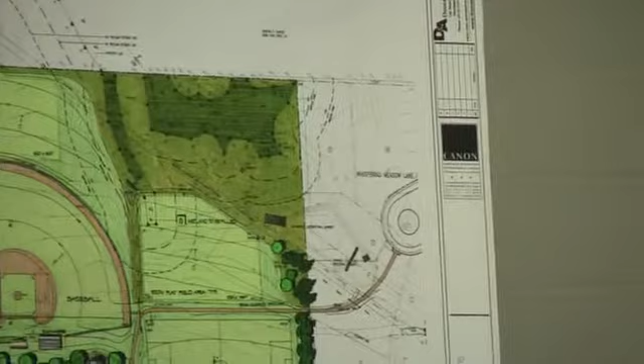The parking facility would connect to Strong Road with a 24-foot wide driveway that we've sensitively located so that it connects to Strong Road in between the existing houses, thereby minimizing the amount of possible night lights that might be exiting the site in the dusk times during the weekend or whatever.

It takes on an interesting, nice curvilinear approach to the parking area. I think it really stands nicely from a configuration standpoint to lend to the park-like setting. That also would allow us to tree up the entrance drive to the parking area, and also provide shade trees around the parking lot.

Landscaping of that type, I feel, would also add to further buffering from the residents of Strong Road—both the visibility of the activities and structures within the park, and it would probably also act as somewhat of a noise attenuator when there are large groups there.

At the end of the parking facility, our thought was that would be a convenient place for siting a building that would provide concessions during events. We all recognize that concessions can be a very supportive activity during recreation or sporting events, so we wanted to accommodate for that. This building would also have restrooms and enough room for storage of athletic equipment.

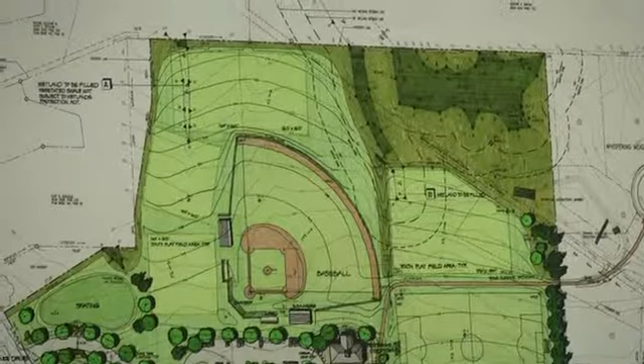Adjacent to the concession stand, we also located a play lot area that would be treed and protected from the south for a little bit of privacy. Perhaps adjacent to that would be a small patio connected to a walkway apron around the building, which could accommodate some picnic tables.

Perhaps there's some supervision that would be required for kids that might be using the play lot. The picnic tables would certainly accommodate that, as well as offering a place for people to eat and have lunch.

Most of this, the upper right-hand corner of the site, is predominantly the dark green area, predominantly a wetland area. So we would not be developing anything in that corner of the site. It's about an 18 to 20-acre site, so you can see that maybe about a couple of acres up in that right-hand corner that we would not be using.

One of those small little features that we thought might be a nice element too, which could be accommodated towards the front of the property - all we need to do is excavate a shallow depression or something that could accommodate some skating in the wintertime as well. Kind of a passive activity that we thought might relate well to being closer to the Strong Ave roadway.

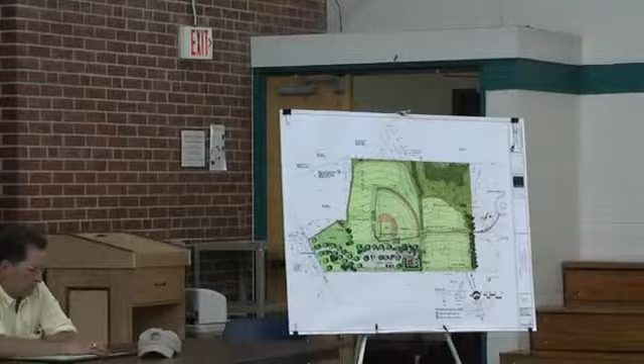We have given some thought to some pathway systems that would take place on the site, and we've illustrated on the plan displayed a pathway connection between a new cul-de-sac that has been constructed to the right of the site. It runs off the paper - Whispering Meadow Lane, I think is the name of the street.

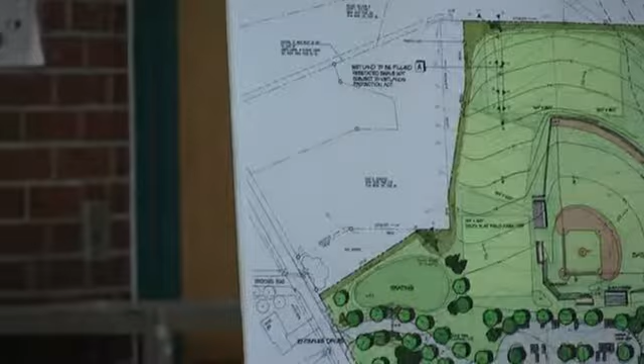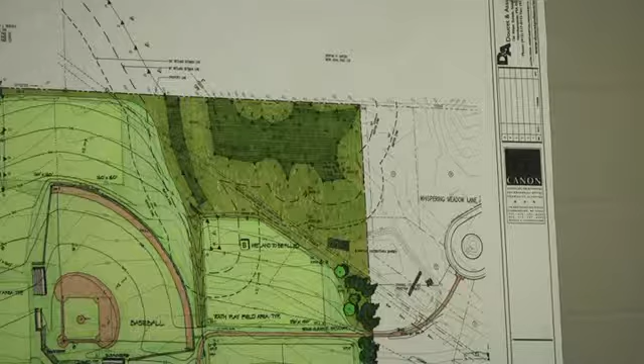That would offer some circulation from East Street through the roadway, and people from that area could then walk into the recreation area. That pathway would run between some soccer fields and eventually culminate at the concession stand area or at the end of the parking area. People can walk down the parking area and the roadway to then enter out onto Strong Ave. So that access is accommodated for people on Strong Road and in that vicinity and on East Street.

I think that's basically what we've looked at up to now, and I'll turn it back over to you, Tom. Thanks. So in essence, this is a design team - this is a lot of the work that we've been doing over the last 7 months or so. This is the plan as the culmination of all the efforts that we're doing, as well as the committee's.

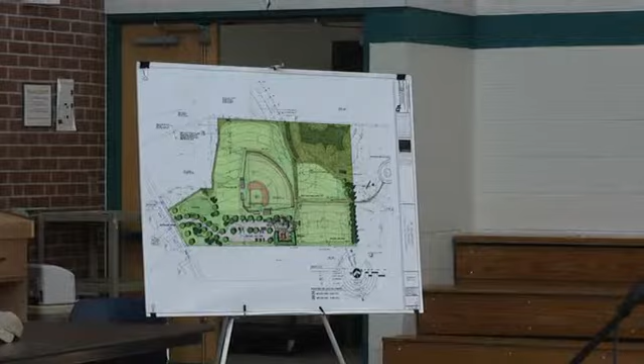Any other questions? Just one more. About the wetlands, is it okay to say, could we use those for educational purposes? Not that we're going to have people chasing around in it, but one of the things in the grant is that you are going to keep some of it as open space, and I love how the design is keeping the people in the center and the open space around, which I think is fabulous.

But could we use that open space for something? We can use it for certain things. The committee had talked to the design people about putting elevated platforms out there for observation, or even elevated walkways.

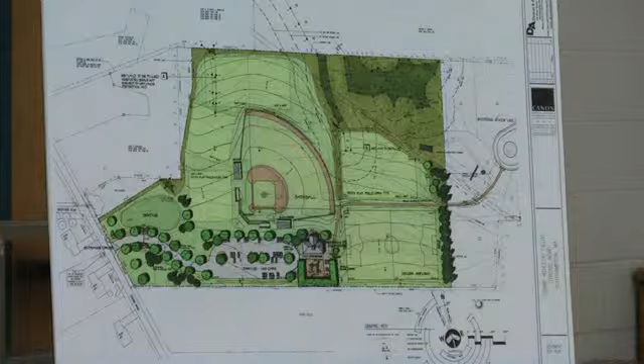So all these are things we've discussed, and we're not done. These inputs are important. There was a survey done for the Recreational Needs Committee, which this committee, as well as the brain power of the various members, have done a tremendous job developing these plans. We, as a committee, collectively have very good ideas, and a lot of them are incorporated. But we also are looking for additional comments and things that we might miss. So if people are listening and they see this tape, you can send your correspondence to the town hall here at the Board of Selectmen's office, and they'll get to us. Even a simple comment as far as a walking path or an exercise area - these things, if you have a comment, we want to hear about them.

So, is there any other members here in the committee that want to say anything? Just say one thing.

Hi, I'm Jim Bischoff. I'm the president of the Southampton Youth Athletic Association. I just wanted to touch base a little bit more on our terminology of a premier field. I don't want people to get the wrong impression. The 90-foot diamond and the soccer field are only comparable to what other communities already have. We find ourselves at a loss - we have a 90-foot diamond that we can't even use for tournament play because it doesn't meet specifications. So when we're talking premier fields, we're not talking about something that's going to be elitist. We're talking about something that meets the standards to play tournament. The soccer field that we're looking at - we want a permanent soccer field that can be used year-round. Right now we don't have that. So these are the type of things we're looking at. I just didn't want anybody to get the impression that we're building some elaborate ball field out there. That's not the case.